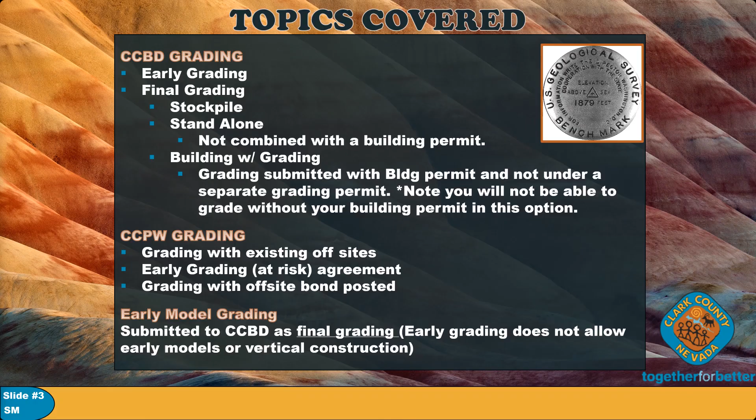This is submitted to the Clark County Building Department as final grading because early grading does not allow early models or vertical construction.

So high level, to show you here, there's these 2 separate processes. We have the public works grading process that's associated with your offsite improvement plans, and then you have the building department grading permit processes. When we refer to early grading, public works has an early grading process and we have an early grading process, and they are not the same.

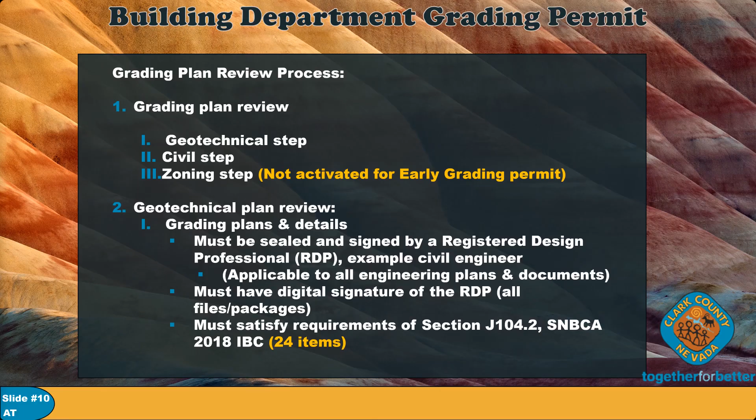Next slide, please. The second one is the soils report. That's the elephant in the room. It requires a lot of review, and it should be prepared per section 1803.6 of the Southern Nevada Building Code. It must be current, meaning it has to be within 12 months.

If not, it should be accompanied by an update letter. If there are addendas, they have to be included during the submittal to be reviewed.

We also require a letter of compliance from the geotechnical engineer of record, stating that they've reviewed grading plans from the civil, foundation plans from the structural, and they will indicate which sheet labels or numbers, and the dates of the stamp of the seal, so that we know they reviewed the latest submittal.

And the fourth one is if the disturbed area during grading is more than 1 acre, the client has to submit a SWPPP document. SWPPP is the Southern Nevada stormwater pollution prevention plan, and it can be found on our website.

In general, the note to the client is that once a permit is issued, any revised plans or documents must be submitted by creating a revision in the citizens portal. You cannot just upload it as a document to the permit that's been issued; it doesn't get processed.

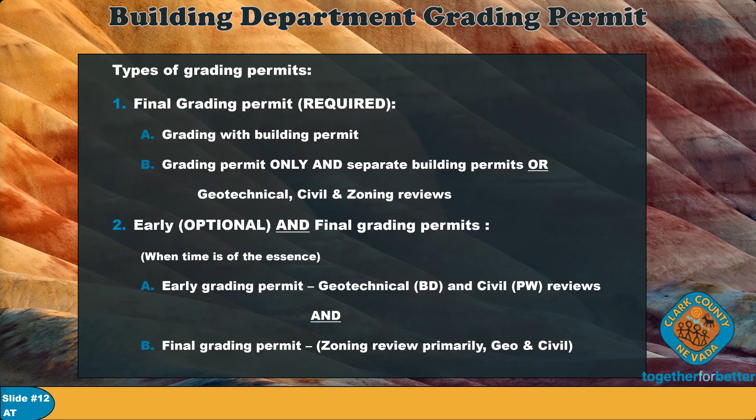Next slide, please. So I'm going to discuss the second part, the one with early grading and final grading first. In this one, both columns are two separate permits, but they both have to be approved ultimately to get a building permit and to go vertical. During the early grading permit, its main purpose is to get on-site grading only. It helps you start off with your grading, and the rest of the zoning reviews and the building plans will come later.

It must always be accompanied with the final grading permit. We prefer that you open the early and final grading permit at the same time, but you can also open final grading down the road when you're ready. It's optional. Early grading cannot be used for wall, fence, and vertical permits. During the early grading, a complete geotechnical and civil review takes place, no zoning review.

Geotechnical reports, update letters, addendas, and SWPPP documents are all submitted and reviewed under the early grading. Clark County Building Department approved quality assurance agent is selected and the QA agreement is signed. Special inspection items are identified during the review process and documented. Conditions of approvals are activated.

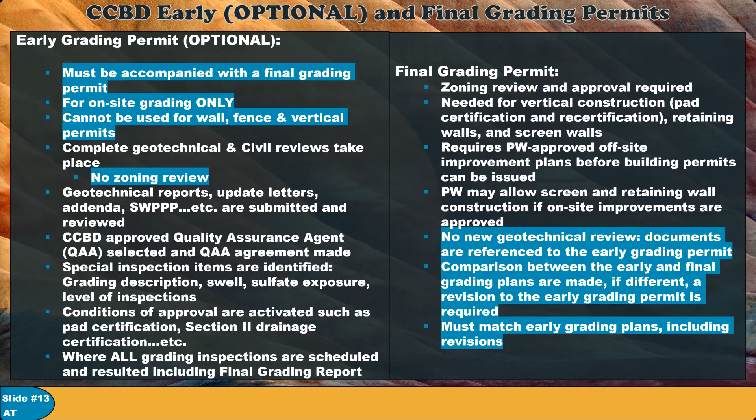Next slide. Okay, yes. So if you chose the final grading only, without the early grading permit, geotechnical, civil, and zoning review approval is required prior to issuance of the final grading permit. It requires public works off-site improvement plans for the building permit to be issued, and the grading permit must be issued prior to the vertical permit. Public works may allow screen wall and retaining wall construction if on-site improvements and zoning are approved. We'll discuss this a little bit more.

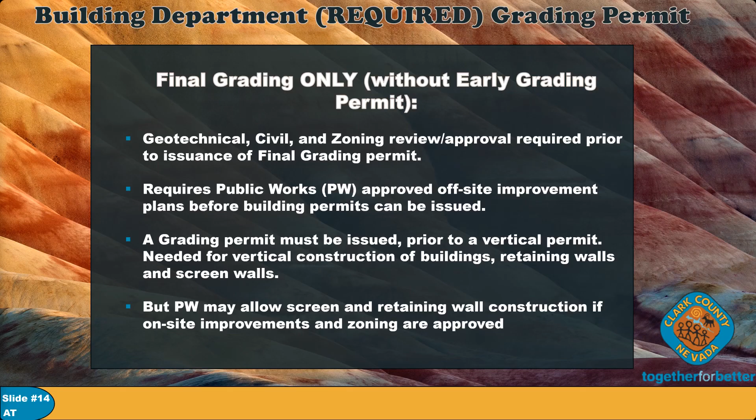If you have questions, it goes back to you guys, and the customer responds to it. Once they are approved, it's complete. You can do pretty much everything with that permit - you can go vertical, build walls, grading, everything.

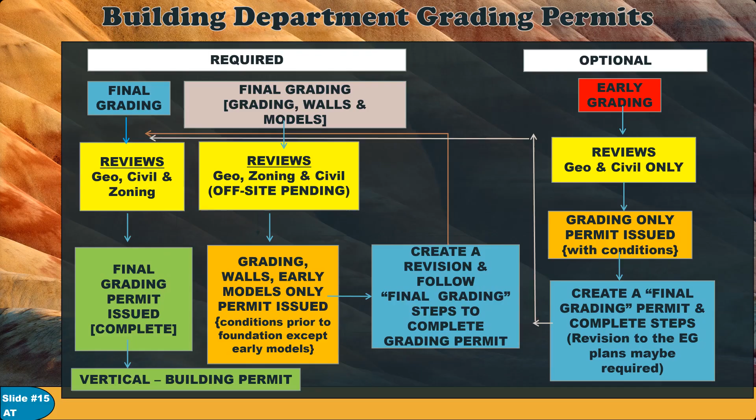Now we'll move over to civil review, and Debbie with Public Works will talk to us about what she looks for. Good afternoon.

Again, we're trying to keep this high level. I know you guys have lots of questions all the time, so always feel free to reach out to us individually. I want to start at the beginning of what establishes all the steps before it gets to the building permit process. So the civil review grading, we base it on Title 30. All the requirements in Title 30 are listed for development, and most of the portions that talk about the order are listed there, Title 30.06.11.

In that section, it refers to land use applications being required. And the land use application is what triggers what is required, like a drainage study, offsites, dedication of right-of-way, traffic studies, all those sorts of things. A lot of those things are happening way before building permits start, and that is the premise of my review, to make sure the drainage studies happen first, and then we can start the grading process from that, depending on the options you want to do, as Abe explained.

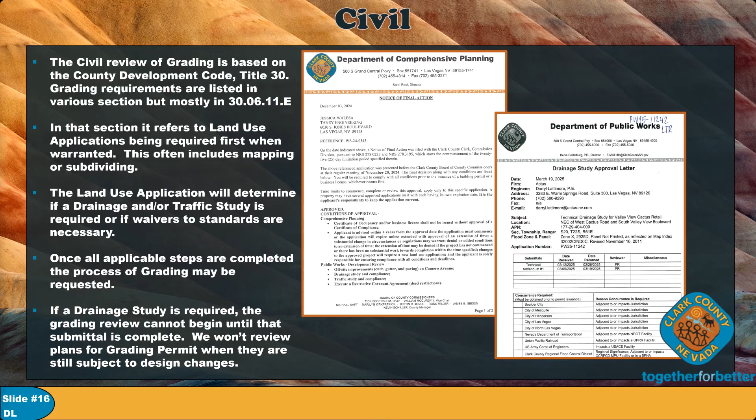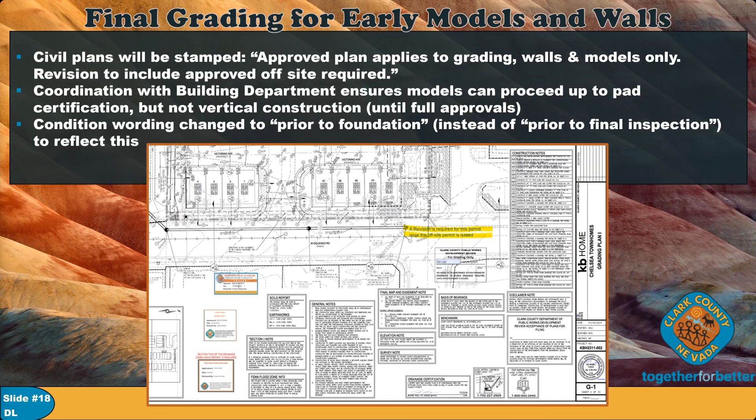For subdivisions or commercial development, the grading submittal is required if the intention is to grade on site prior to the offsite. We talked about that, but the early grading, or our grading process, is mostly focused on the finished floor elevations, because if you're just out there grading and you want to get your pad certs, we're not looking at every detailed aspect of those plans since they're really just for grading.

More of what we talked about: grading only, revision needed. Another thing for commercial developers is if you apply for early grading or final grading prior to your offsites, when it's time for you to get your shell buildings, and I'm telling you offsites are needed in order to get those permits, then geotechnical is going to turn around and say these plans need to match your grading plans. Again, as soon as you get offsite approval, do those revisions, and it makes everything consistent and avoids some of the problems.

One of my biggest roles in my position is to make sure that the plans between Public Works and the building department are consistent throughout the project. So again, as you're doing revisions to, say, the building department, those need to come to Public Works and vice versa, so that no matter what you're changing, however those plans are affected, it's important that you submit to both, so that in the field you don't have three or four different versions of plans, like a building permit plan with Delta 3, but offsites built with Delta 5. So just to eliminate those problems, keep your plans up to date.

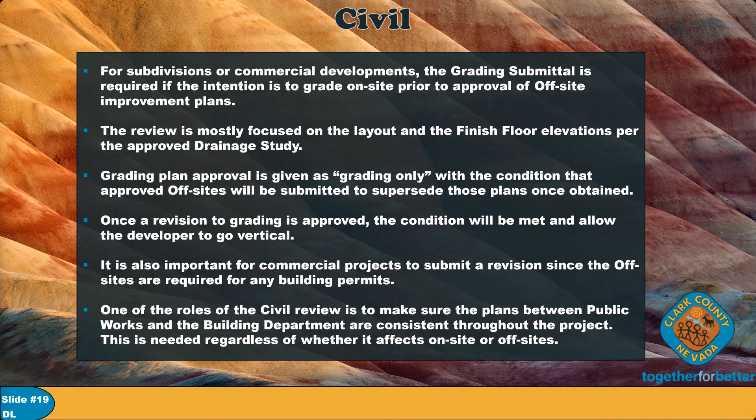Okay, so some of the differences are, as I said, if a drainage study isn't required, the civil review of something like a residential lot is only done through the building permit review; it doesn't typically require a separate submittal to Public Works. Because I review through the portal, in the plan room, all of my review on drainage type things, and any Title 30 requirements go through the building permit, with the exception of floor waivers, which come straight to us.

Civil determines if the structure will meet flood protection criteria and requirements for additional dedication of right-of-way. Drainage easements are also determined with this review. The plans must demonstrate that there won't be any conflicts with easements or drainage improvements.

For the most part, reviews are based on previous studies on record. That's where I'm basing the finished floor, the drainage pattern, or the fact of where the flow was coming through that lot. If the parcel is impacted or in any way in a flood zone, a drainage study is needed. So say it's a vacant lot, we're building a new house and it's in a flood zone - we don't have options, you need to do the drainage study. And that's going to take time, so again we circle back and you have to wait for that to move on to the next step.

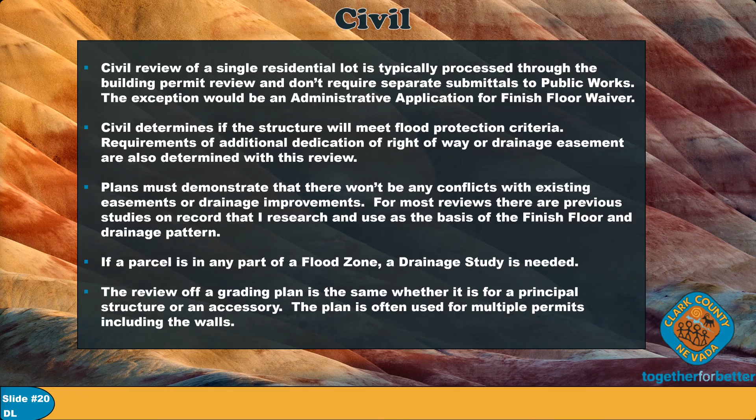The criteria our reviews are based on is what we call the drainage manual, the hydrologic criteria and drainage design manual. That is through the regional flood control. It's on our website, and it is used by multiple jurisdictions.

A lot of times someone will ask, well, where did that criteria come from, what's in that manual? If it's not in Title 30, it's in the drainage manual. We also refer to the RTC standard drawings for some things like driveways, legends, abbreviations, for single family grading reviews.

We use the sight visibility zone for corner lots, whether it's for wall permits or when we're looking at the grading for a new home, and that link is also provided.

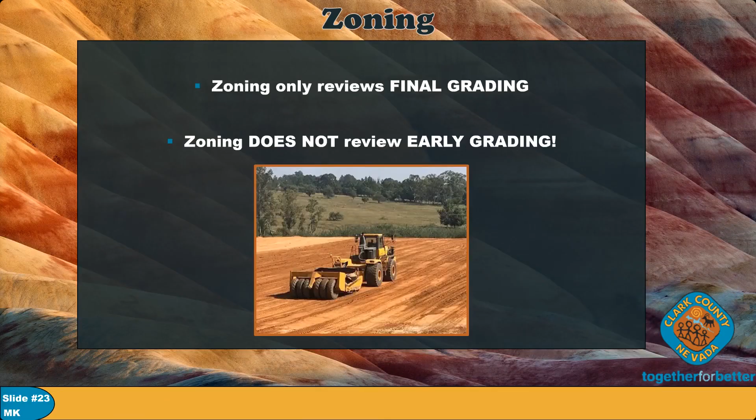Zoning only reviews the final grading. Zoning does not review early grading.

What zoning does review is we check on the correct parcel number, approve the acreage for the site on plans, and what title the site is in, whether it's Title 29 or Title 30. We look at the relevant land use, and if the land use is close to expiration within 6 months, we contact the applicant so they can start applying for an extension of time.

We review files for NOFA and conditions of approval, normally we review those and put them as conditions. Is the grading plan in conformance with the plans approved on file? So we look at the land use and compare it with the grading.

We look at the airport environment and the overlay districts according to Title 30, and the zoning and permitted use.

Zoning also checks on legality of the lot or lots, perimeter, lot dimensions if there's a map, setback - side, front, corner, street. We check also if there are existing easements, vacations and abandonments, whether they are in process or recorded. We also check on special setbacks, for example if they are on Boulder Highway or Las Vegas Boulevard. Other things we check are the lot coverage.

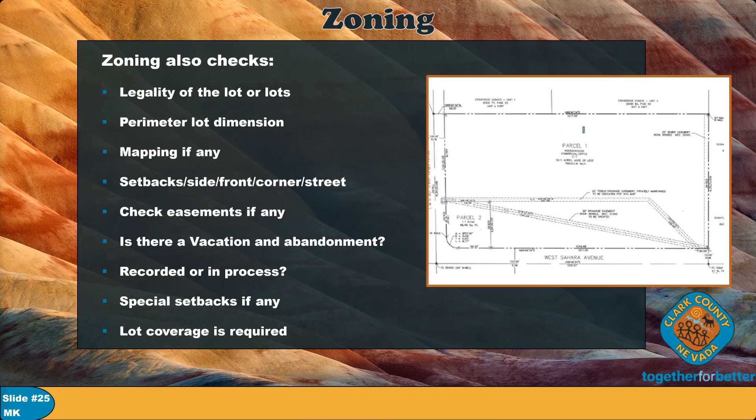We check landscaping area and width. We check parking lot landscaping area per Title 30. We check parking spaces with dimensions and drive aisle according to angles which the applicant chooses, the width per Title 30.

Zoning also checks if the applicant is working with Public Works for a drainage study if required, and off-sites if in process. If retaining or property walls are required, they must be shown in their specific locations, along with detail sheets and cross sections. If a site plan is used, horizontal control and the landscaping plan must match grading plans. People sometimes forget that one, so you have to watch for it. Zoning always coordinates their final approval with Public Works and geotechnical.

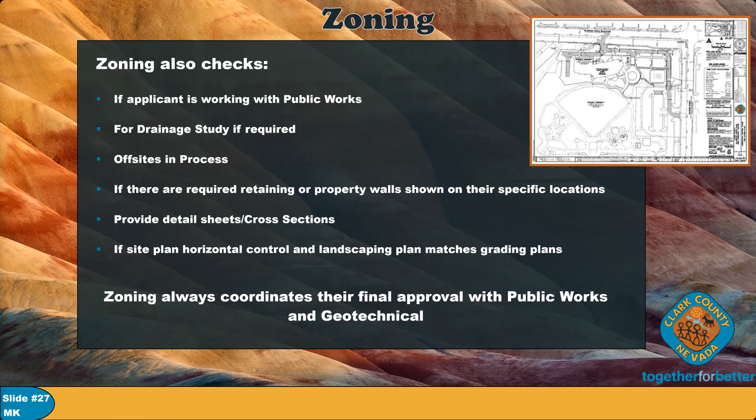Let's move on to plan coordination, which takes place after all the reviews are complete and approved. Once all the departments have reviewed and approved your plans, the permit will make its way to our plan coordination team in order for us to add any conditions required prior to permit issuance.

Once all these conditions are processed, the permit moves to the pending fee workup team, where they put the fees together, so it moves along from us to them.

Now some information about grading contractors. This is for grading contractors only; permits being issued to owner builders can skip right over these steps. But every grading contractor must have their own citizen access account, and you must make sure you link or add a license to that account.

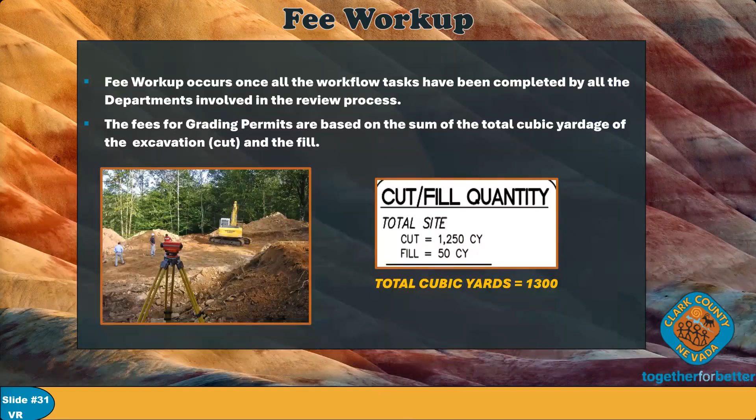Now we will move over to fee workup. For grading permits, the fees are based on the sum of the total cubic yardage of both the cut and the fill. So in this example, if the cut is 1,250 cubic yards and the fill is 50 cubic yards, the total cubic yardage for the fee workup would be 1,300.

To obtain an estimate for the grading permit and plan review fees, there is a fee calculator on the Clark County Building Department website. Go onto our website, click services, plan issuance, and then fees calculator. Once that opens, click on grading.

When you click on grading, the fee calculator opens up. From the example on the first slide, you can put in the 1,300 cubic yards on the left side, click calculate, and that will give you an estimate for the permit fee and grading plan review fee.

Additional information regarding the fees can be found in the Clark County Building Administrative Code, which is also located on the Clark County Building Department website under Services, Library, Current Codes, and then Current Codes Ordinance.

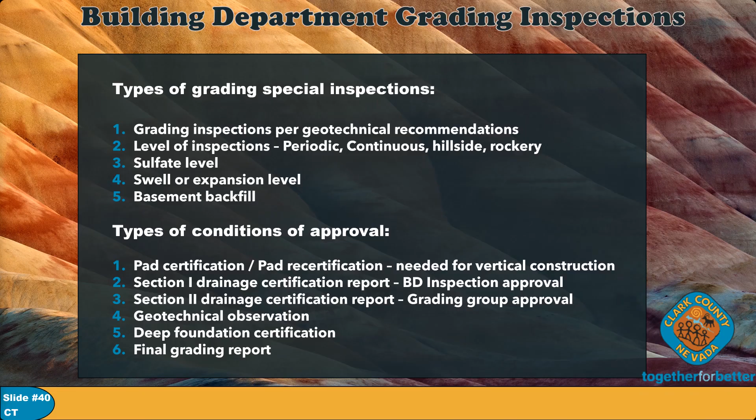Resolution of conditions of approval. Project startup form is pretty much a form that the third party gives us, letting us know that construction has started on site, and if everything's good, they will not issue any sort of non-compliance.

But if work starts and there's no permit, no approved construction documents, they'll come with it attached with an NCR, and that will let us know that work is starting on site and the necessary documents are not there, and we'll probably do a site visit on that one as well.

Number 2, pad certification and recertification. Again, that's just an interim document, especially the pad certification, and then the final grading report will follow.

Section 1 and 2 drainage, that one there, again, is just an uploaded document that we review, especially for the Section 2. The Section 1 is pretty straightforward. These documents can be found in TG50.

Geotechnical observation is probably the only document that's under technical guideline 10 that's separate. Again, this one's from the geotechnical EOR, where they actually go out on site and perform the observations that they recommended for the job.

Deep foundation certification is covered in TG50. For the final grading report, see section J, numbers 1 through 24. That's a list of items we follow when reviewing a final grading report, and pretty much all the agencies are aware of the items we look for.

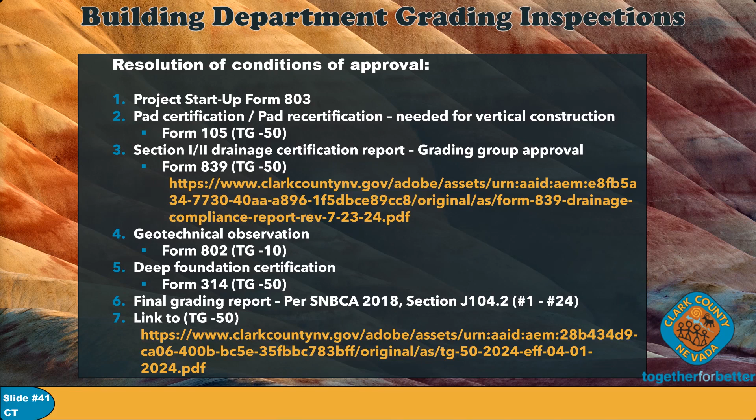As you can see, Ava has the links and the attachment on the presentation. Go ahead, next slide, please.